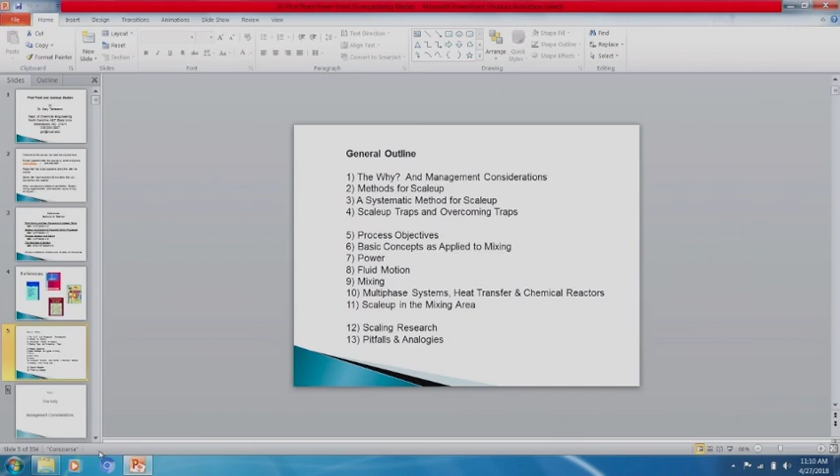The course is divided into three areas: why you do scale up, which you could call management considerations; methods for scale up, a systematic approach for scale up; and scale up traps and overcoming these traps. This material is directed towards understanding scale up in general. These are more specific scale up discussions about what occurs in an agitated tank, and this is about scale up research and pitfalls that one encounters. I also talk about pitfalls and overcoming various traps. So let's dive into this material.

The why, okay. The purpose of scale up is the creation of wealth. That's the primary objective.

Examples of scale up are penicillin, TiO2, NutraSweet, flu vaccines, and I'll toss in the airplane for some mechanical device scale up. The airplane obviously started out with one person aboard, and now they can put 500 people on an airplane, and in a sense that represents a scale up.

Scale up depends a lot on trial and error, a lot on serendipity, and a lot on simple luck. Luck visits those with a prepared mind—that's a statement attributed to Pasteur. It's very, very true.

The reason you have a prepared mind is much like a football team or sports team practicing—you get prepared for when the big game happens. It's the same sort of thing. You continually learn, you continually develop, and you're more likely to capitalize on luck.

Let's take a look at the Wright brothers and the invention of the airplane. The first thing you should recognize is that they invented the airplane without a design manual. There was no preconceived design manual available, so they had a lot of attempted flights and a lot of crashes.

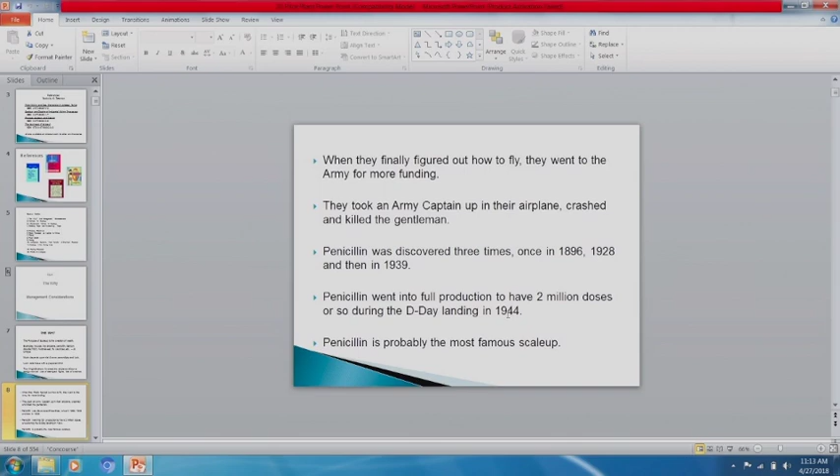If I take a look at penicillin, it was discovered three different times: 1896, 1928, and then in 1939. Penicillin is perhaps the most famous scale up because of World War II. In 1939 they scaled up the process, and they probably had 2 million doses of penicillin by the D-Day landing in Normandy in 1944.

TiO2, titanium dioxide, is a white pigment used in almost everything. In the development of DuPont's TiO2 process, the research equipment kept on exploding again and again. Many times the researchers had to ask for money or funds to rebuild their equipment, and when they finished the scale-up, the TiO2 process was essentially a controlled bomb. So scale-up does have its hazards.

NutraSweet was discovered by accident, again simply by luck. Present day, you have flu, swine flu, bird flu, whatever—these vaccines are limited by the method of production. How much you can make is limited by the method of production.

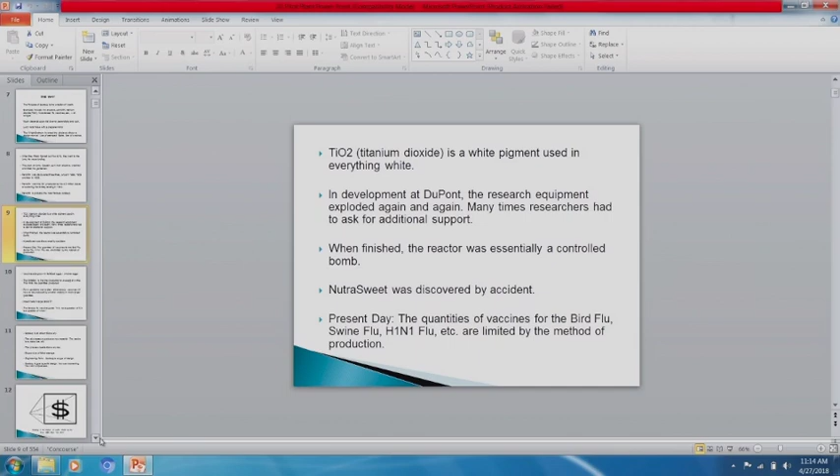Vaccines are grown in fertilized chicken eggs. I'm not quite sure how many doses of vaccine they get per egg, but the fact that they're fertilized eggs means there's going to be a production limitation somewhere. Vaccines should be produced by other methods so we can obtain much larger quantities, perhaps scaling up to insect cells in large tanks. These insect cells are living items, so particular attention must be paid to keeping the cells alive.

The famous quote from people in the flu vaccine area is, 'It's not a question of if, it's a question of when.' It's not a question of whether a flu pandemic will happen—it will happen, it's just a question of when. It's an interesting statement, really a statement about funding. It's basically saying, please send more money.

Scale up is all about discovery. The lab creates a product, maybe a new material, and the desire is to make lots of it. The process needs discovery too—expect a lot of failed attempts. That's very true, and I'll repeat: the process needs discovery too.

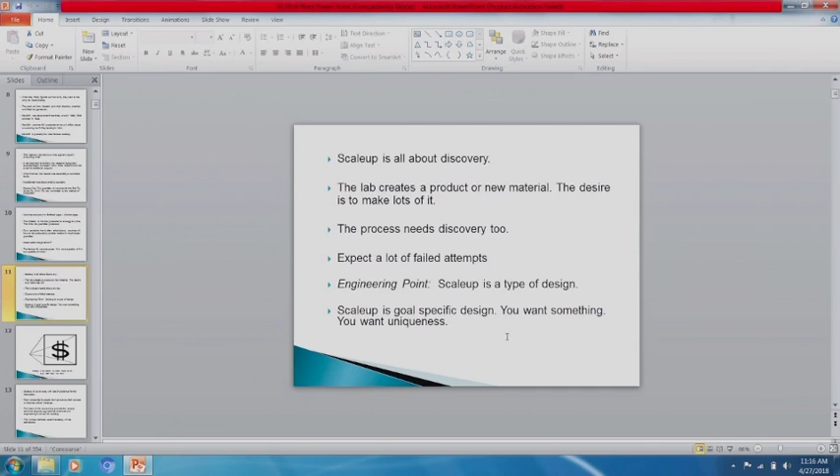A very important point often missed in scale-up is design. Scale-up is a type of design. Most people who do scale up are not design engineers, so they have a tendency to do things that design engineers wouldn't necessarily do. Scale up also tends to be goal specific—you want something, you want uniqueness.

So here's the scale up of the idea of the creation of wealth. Way back here is the lab. The lab people are very important because they are the ones who create the new product. Then the problem with scale up is that you have to make large quantities of that product.

There's lots of stories I can go into. One company made a really fantastic product, and their lab was sufficiently large that they could produce a large quantity of the material, which they sent out to their sales staff. The sales staff sold all this product, and the company got a huge number of orders coming in. Then they realized they didn't really know how to scale up the process to make a whole bunch of this material. So that was a series of bad events, I guess.

Good events, bad events—and they had a motto for this product: 'We will make this product no matter how much money we lose.' You don't want to be in that situation. You'll also notice that the lab people are not design engineers—highly likely that they're not. It's also highly likely that things will change in scale up. The procedures may change; whatever you did in the lab is not necessarily what you want to do at full scale. You want versatility in your design, to be able to change things.

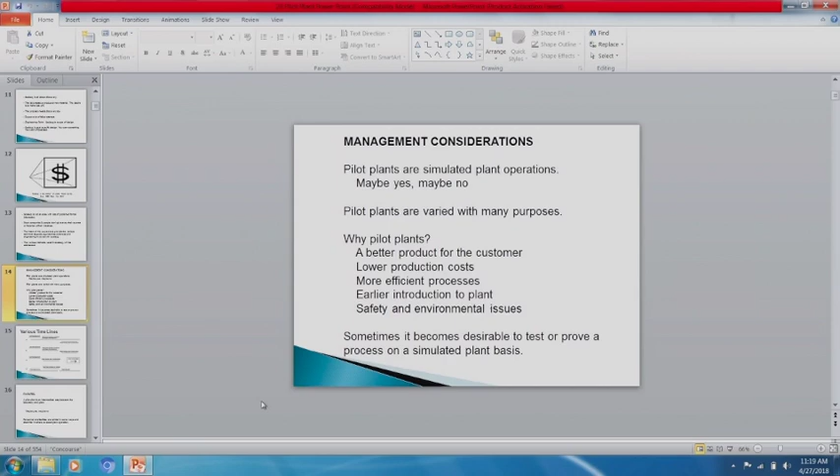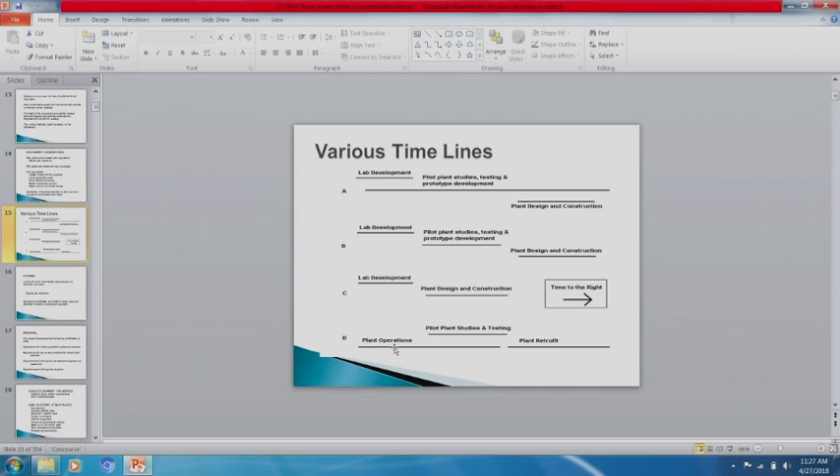Facilities - well, a pilot plant might be an intermediate step between the lab and the plant. Personnel and facilities, similar in some ways and dissimilar in others. Personnel, now this is kind of interesting - it's wise to have personnel that have a combination of skills.

Hopefully they have experience of what's possible in a plant environment, experience with day-to-day operations or problems that arise in a plant. Then you need somebody with the thinking and experience of a developmental engineer and researcher. That's one idea. The third property is the experience and thinking of an explorer. If you're doing true scale-up, something that's never been done before, you will find that you're exploring, basically.

Thinking and experience of a developmental engineer and experience in day-to-day operations - those are a fairly unique set of skills. The way you get those skills is you go to the plant and work there for a while, then you go into development and work there for a while, and then you go into sales, perhaps, to identify new products that the customer may want.

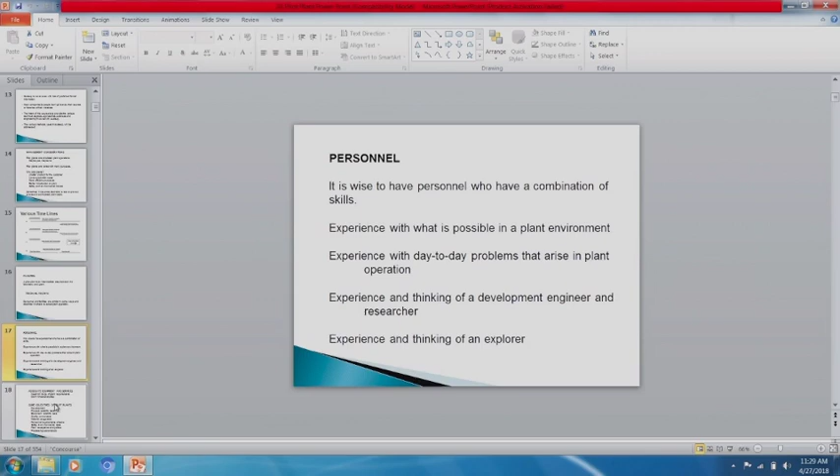Okay, again, this is not - actually, you need a full range of plant. You need equipment that will offer a full range of plant requirements. You don't want to hinder your studies.

Objectives of the pilot plant: development, reliability tests on the process, equipment reliability tests, quality control tests, material usage tests, personnel requirements checks, safety and environmental issues. By the way, if you want to stop a scale-up process, then you raise questions about safety or you raise questions about pollution - that will usually stop a scale-up. Then you have the plant acceptance issues and politics and cost analysis type thing.

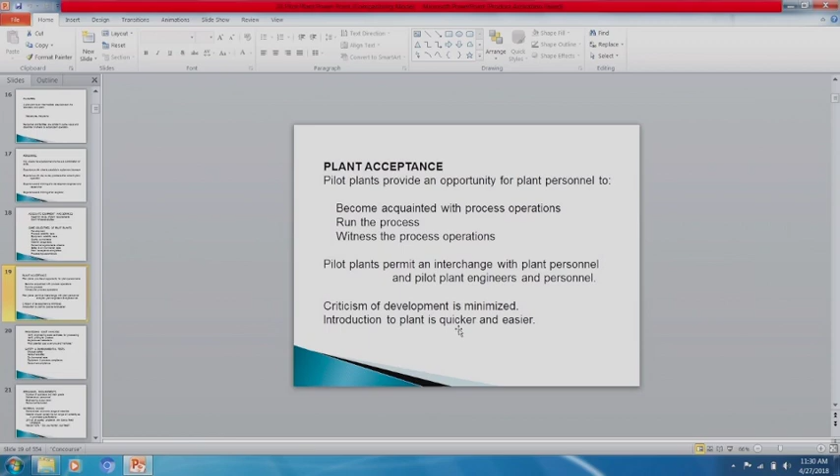Plant acceptance - good idea. It lets the plant become acquainted with the process, allows the plant to run the process, witness process operations. Such operations permit an interchange with plant engineers and pilot plant people. You keep criticism to a minimum and you have introduction into the plant, which is quicker and easier.

Environmental issues, again, we have said that. Personnel, safety, environmental, equipment compliance, personnel compliance. Then you can also perform cost analysis, verify pricing for the product.

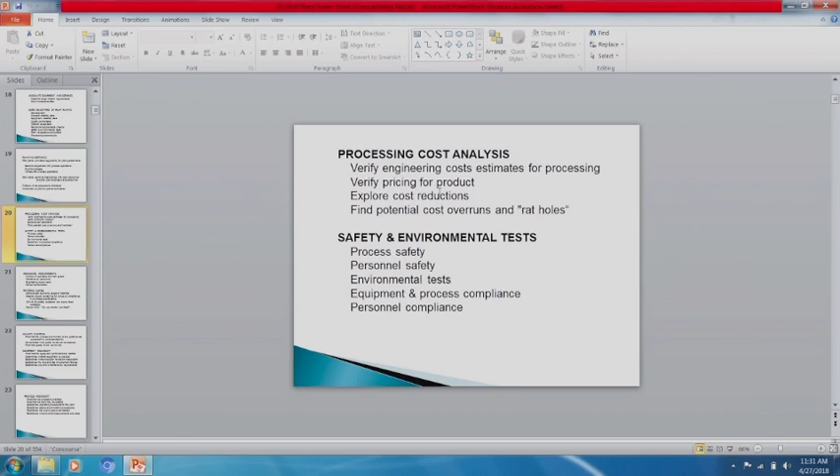Again, you make a batch of material and you send it out to your sales force to see if the product is desired. You're looking for cost overruns, potentially rat holes. You are trying to explore the number of operators you need. Maybe you wanted to explore material usage.

Material should contain a full range of variability that the plant will be faced with, right? See, the chemistry labs often run reagent grade purity, and they have a set of results from those studies. However, the plant may be receiving their material in carloads, and the material quality is significantly reduced in the plant, and this can cause significant scale-up issues. So the laboratory should consider running their experiments, or some of their experiments, with plant-grade material or material that the plant's going to have, rather than reagent-grade material.

And you should always consider monitoring your feed. Funny story here: you had a filtration process and everything was working fine, the filter aids were working fine. Unfortunately, one bag of filter aid contained a significant amount of fines, and that essentially shut down the filtration process. Fines will shut down your filtration process.

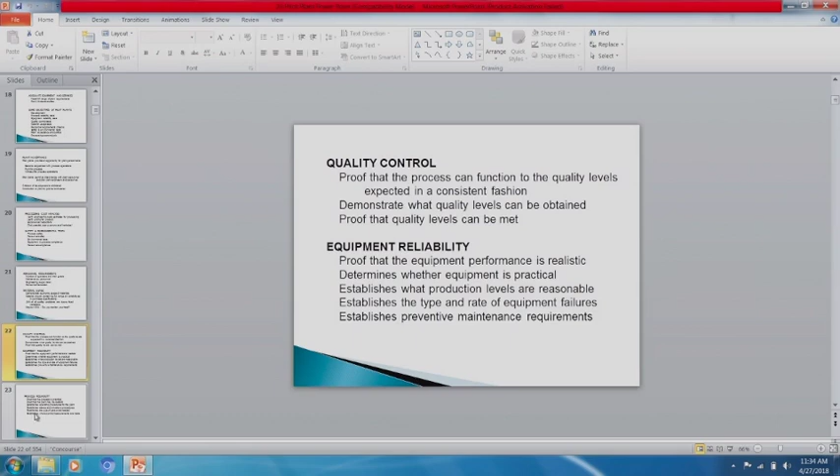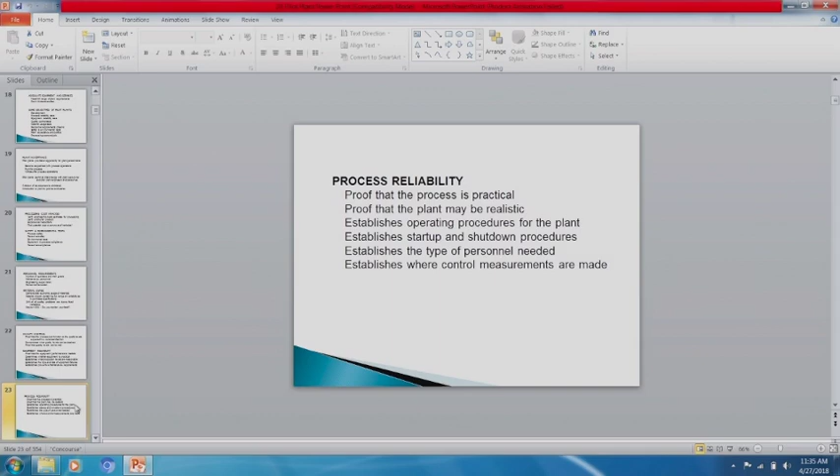If you're going to have process control on your equipment, then you must determine where you're going to take the temperature reading, what flow rates do you want to have happen, or how you're going to make them.

Development, yes, development. Run tests, analyze data, debug, do modifications of the process, improvements and changes, eliminate unforeseen problems, equipment redesign, retrofits. This relieves the plant from testing and permits experienced developmental personnel to work on the problems.

Okay, methods for scale up. Okay.

Methods for scale up. I have identified 4 different methods for scale up. One is repeating designs. It's very common, very standard, not really thought of as scale up, but that's what it is and what it accomplishes. The purpose of scale up is to increase production quantities.

Regular design methods: if you know your process and it's been around a long time, where there are established design calculations, you just design the process. Whenever you design a heat exchanger, you run through heat exchange calculations, determine the area of the exchanger, and then determine what size tubes to use.

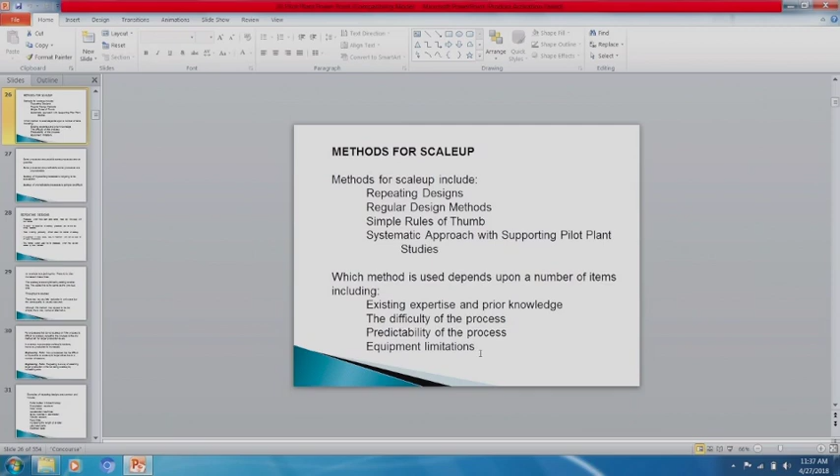The method depends upon a number of items: expertise, prior knowledge, difficulty of the process, predictability of the process, and quickly you run into equipment limitations. You should recognize that some processes are possible, some are not. Some are predictable, some are unpredictable. Scale up of an impossible process is not going to be successful, period. Scale up of an unpredictable process is going to be difficult, period.

So let's look at repeating designs. First off, the process has been done before and needs very little study. To satisfy the objectives of scale up, the process is simply repeated. There's nothing particularly difficult about this method. It's practical in many cases, easy to implement, and can be used for all types of processes.

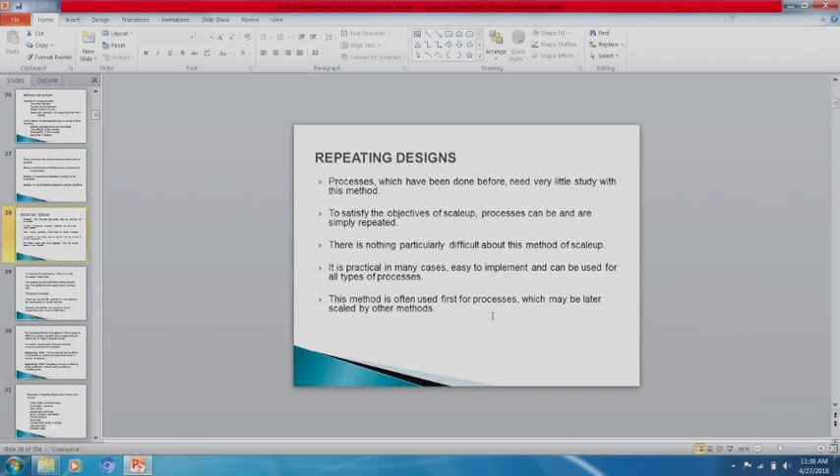This type is often used first, which may later be scaled up by other methods. An example would be a packing line. If you're going to have a packing line, oftentimes the scale up would just be repeating that same packing line.

There's no size increase, so in a sense scale up is not really being accomplished - the added line is the same as the previous one. Throughput's doubled, but there's very little reduction in unit cost. The quality is essentially assured.

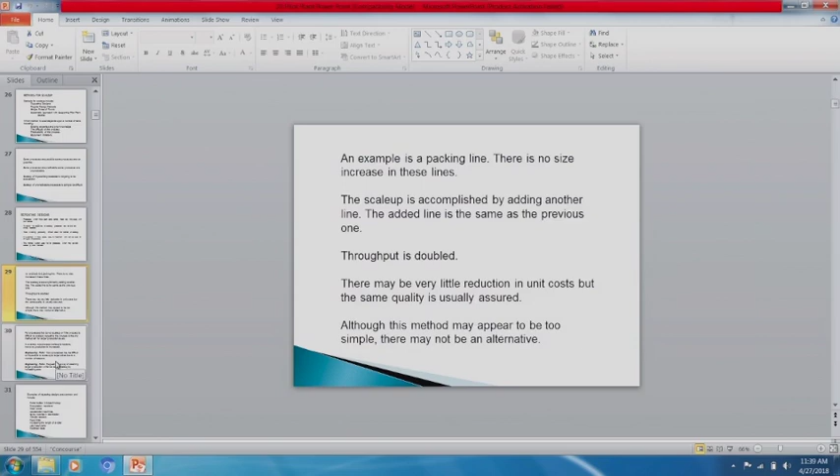This method may appear too simple, but there may not be an alternative. Some processes do not scale, or are difficult to scale. Repeating the process is the only method left for larger production levels. As I said earlier, in a true sense scale up is not done, but production is increased.

New processes may be difficult or impossible to scale up to larger sizes for a number of reasons. Repeating is a way of obtaining larger production while not doing scale up by increasing size. Some examples of repeating design are everywhere.

Roller bottles in biotechnology - you have a roller bottle used in a laboratory, and you've performed studies on how to grow biological material in rotating or roller bottles. You know how that works. Now, on scale up, you just buy 100,000 roller bottles and proceed with your plant operations. However, that can be quite labor intensive.

Precipitation reactions will have a scale effect in them. What's meant there is you add a stream to a batch of liquid and form a precipitate. How that's added determines, or influences, the particle size of the precipitate.

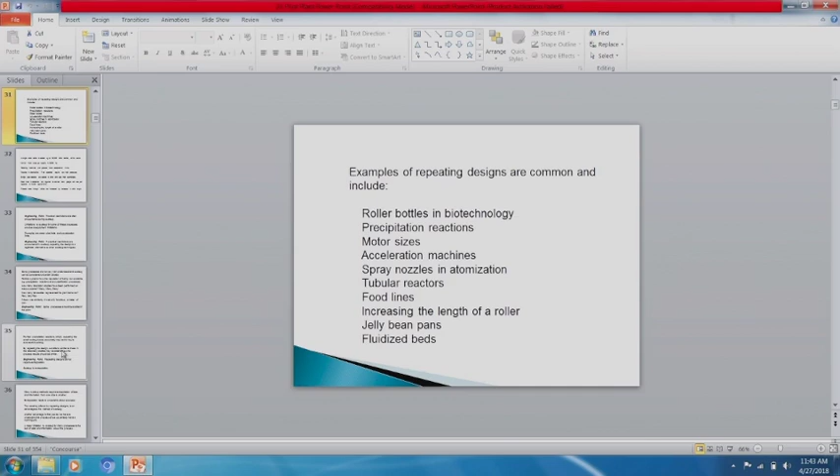So here's a brief example: 100 roller bottles, 6,000 horsepower. Tableting machines and presses have acceleration limits. Atomization is limited by very high pressure drops. Single tube reactors are scaled to a shell and tube heat exchanger. Food lines and cafeterias required to service more people just add another line. Processing rates through rollers are increased by increasing roller length. A couple of things you should recognize here.

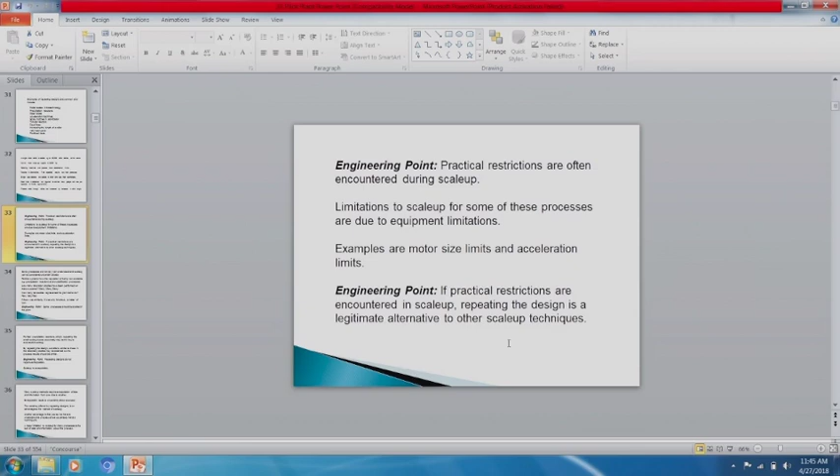Practical restrictions are often encountered during scale-up. Limitations to scale-up for some of these processes are due to equipment limitations. If practical restrictions are encountered, then repeating the design is a legitimate alternative to other scale-up techniques.

Some processes are not very well understood. Scale-up can be considered uncertain at best. Particle systems have the reputation of being non-scalable. Examples might be precipitation reactions and crystallization processes. So when you study these non-scalable processes, you have laboratory studies on those, and you will find that laboratory studies may not be useful to represent plant behavior. If the lab and plant do agree, it's only fortuitous—only a matter of luck.

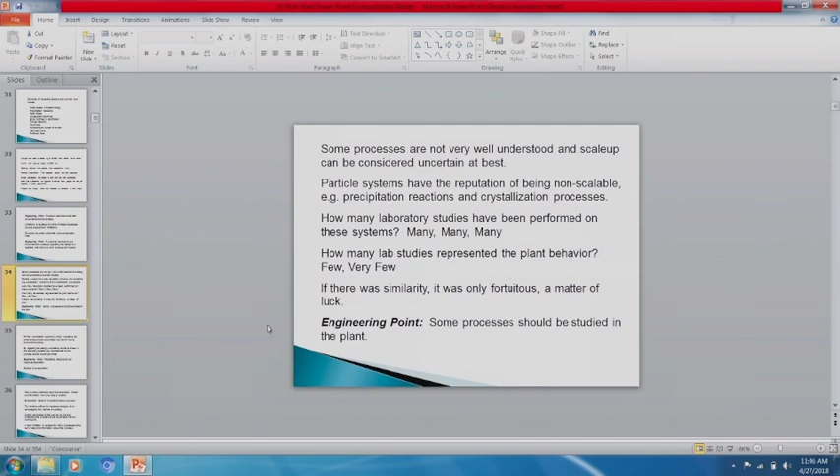Oftentimes some processes, for troubleshooting purposes, need to be studied in the plant. Fast precipitation reactions simply repeat the small-scale process accurately—this may be key to successful scale-up. By repeating the design, conditions similar to those of the laboratory may be attained, as the process results should be similar. So another big advantage of repeating designs: it does not require extrapolation. Scale-up is extrapolation—you are taking things to much larger sizes. If you don't take things to much larger sizes, then you're not extrapolating.

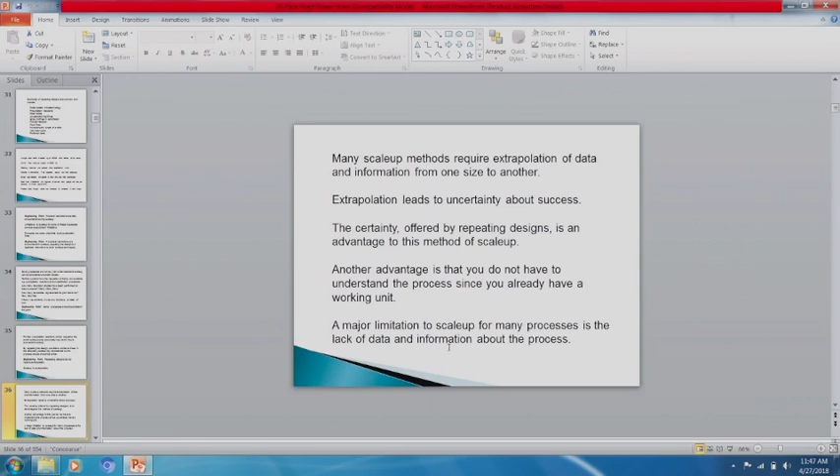Extrapolation can always lead to uncertainty about the success of your process. Many scale-ups require extrapolation of data and information from one size to another. The certainty offered by repeating designs is an advantage of this method of scale-up. Another advantage is you don't have to understand the process—a very interesting statement, since you already have a working unit. You'll find a major limitation to scale-up for many, many processes is the lack of data and information about the process.

Some difficult or impossible processes will eventually be overcome. In biotechnology, mammalian cells in the past were sensitive to high shear. Newer cells are less sensitive. This enables scale-up designs to use more traditional process equipment, like batch tanks instead of roller bottles.

While repeating small-scale processes is a way of handling non-scalable processes, the method is not very efficient. There is no economy of scale, and processing problems may not be solved.

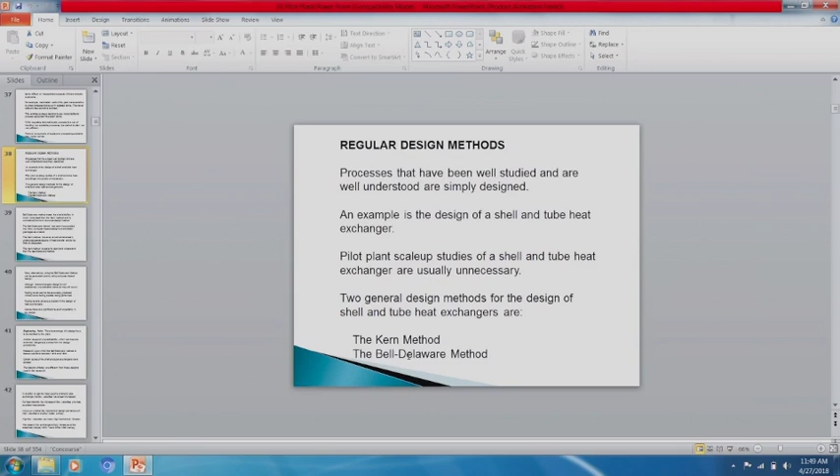The Bell-Delaware method has been incorporated into many computer-based designs—take, for example, Aspen, which incorporates the Bell-Delaware method. Getting into the details, the Bell-Delaware method treats the shell flow in much greater detail than the Kern method. The Kern method is well entrenched in undergraduate textbooks and is easier to use and understand. It took me about 30 days to make sure I understood the Bell-Delaware method thoroughly.

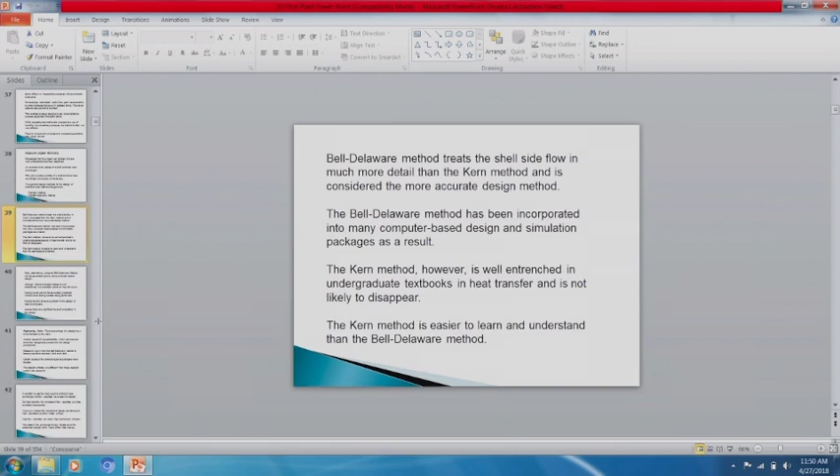Many alternatives can be generated quickly based upon computer designs. That's very important—if it's computerized, you can start varying and asking different questions about different variables, which is very, very useful.

Unfortunately, heat exchanger design is well established, although unpredictable behavior still occurs. Fouling is notorious for being unpredictable, and fouling levels cannot be accurately predicted.

Even with fouling studies, or without them, fouling is always a problem in heat exchanger design, and represents a significant level of uncertainty. You're assuming no fouling, and that's a bad assumption—everything fouls. Fouling is similar to having your dentist clean your teeth; your teeth foul over a period of time.

Shortcomings of the design have to be handled by the plant.

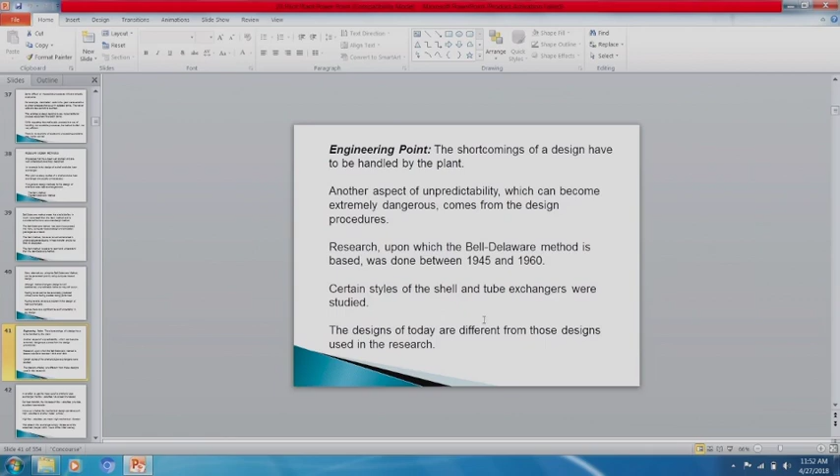Another aspect of unpredictability comes from design procedures. The research for Bell-Delaware was from 1945 to 1960, and during these times only certain types of heat exchangers were studied. Today these designs are quite different—so you have evolving designs.

In an effort to get the most out of shell and tube heat exchangers, flow velocities have been increased. Heat transfer increases with velocity; however, whether your mechanical design can take such high velocities is another matter. You increase heat transfer, but you also increase mechanical vibration. Sometimes the tubes of the heat exchanger simply vibrate out of the tube sheet, and the heat exchanger only lasts for several hours. A heat exchanger can cost $1 million.

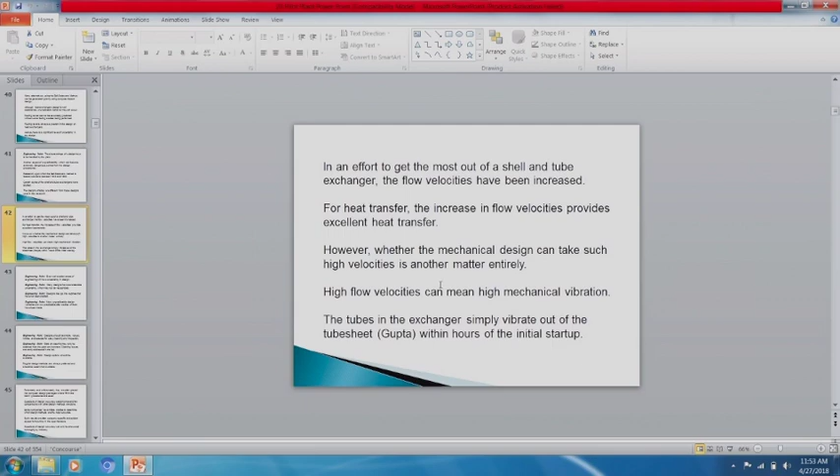So even well-studied areas of engineering will have uncertainty in designs. Many designs have considerable uncertainty that's not recognized, and may go into regimes that have not been studied. Many unpredictable design variables become very predictable after studies have been made of them.

Design should be simple, robust, nimble, and selected for easy cleaning and inspection. Data on cleaning may only be obtained from the plant environment—cleaning issues are rarely addressed in the lab. I was visiting Merck, a drug company, and sitting across the table, the design engineer said he didn't care about this or that; what he cared about was whether he could clean it, and that's critical. Cleaning can be quite critical for some materials.

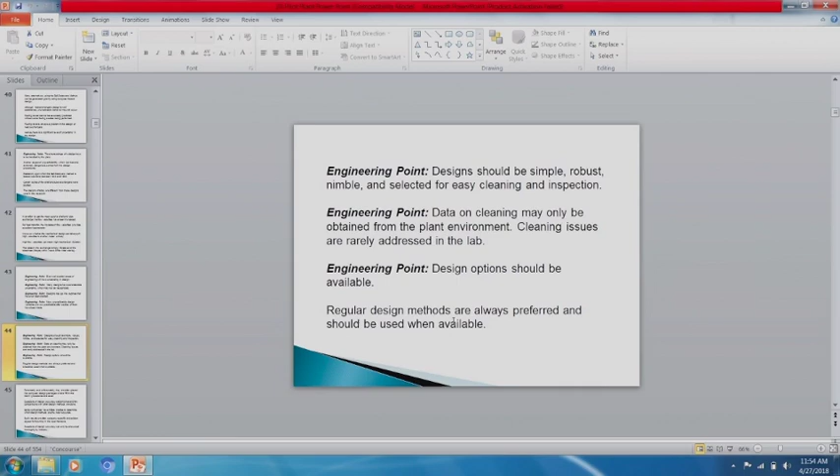You should always have available design options. Regular design methods are always preferred and should be used when available. Fortunately and unfortunately, they're often packed into a computer design package where fill-in-the-blank procedures are used, and questions of design accuracy seldom arise. Everybody believes a computer—can you imagine that, believing a computer?

Some companies have initiated studies to determine design methods for heat exchangers. This is company specific and seldom appears in forthcoming open literature. The question of design accuracy can only be answered thoroughly by industry.

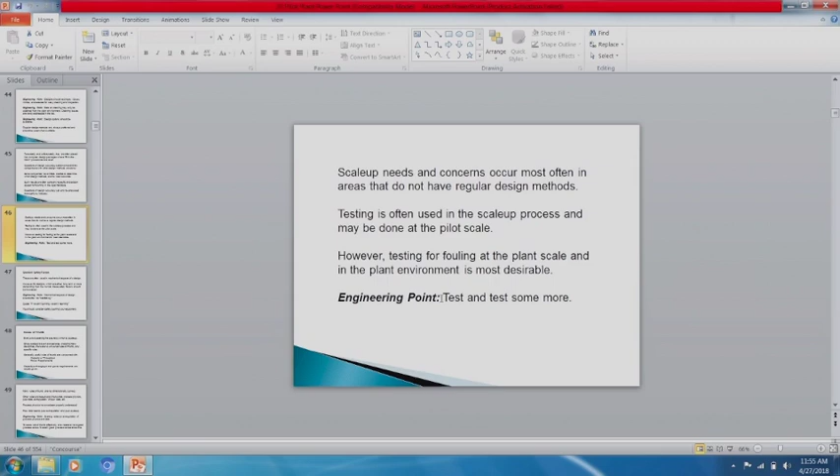Scale-up needs and concerns occur most often in areas that do not have regular design methods. Testing is often used in the scale-up process and may be done at the pilot scale. Testing for fouling in the plant scale and plant environment is most desirable, so you're more apt to test and test and test and test some more, basically.

Safety factors—quite an interesting area. Useful in mechanical aspects of design. Typically, mechanical engineers will use a safety factor of 1.5; maybe you should go with 2.5, just from the point of view that you will probably be pushing your equipment. So mechanical aspects of the design should be beefed up.

A quote from Mobil Oil Corporation, before they were part of Exxon, basically said, 'if we ain't burning, we ain't learning.' What that means is if we're not pushing the equipment, we're not learning anything about it. You should always consider safely pushing your equipment.

If I go to Europe, the Europeans are very precise people, very different from Americans. When they design something, they want to run the equipment at the design specifications. In the United States, however, running the equipment at the design specifications was what was being done 3 years ago. They've pushed the equipment beyond that by a considerable amount, and as a result they're making more profits. Again, the idea of scale-up is to make profits. You should always consider pushing your equipment.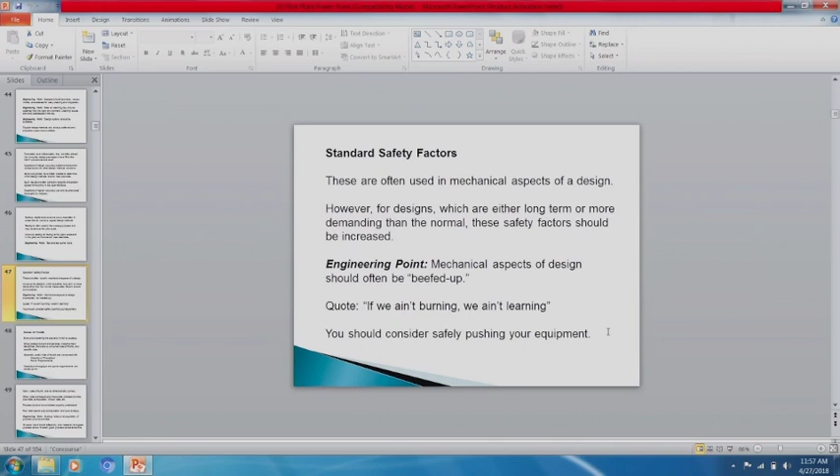Rules of thumb? Basically, everybody's seeking the secret by which scale-up can be done. It's such a broad area, crossing many disciplines, that there's no universal rules of thumb. Typically you're interested in capacity, throughput, and power requirements, and usually you find these are given.

The data, unfortunately, may not support some of these rules of thumb. Watch out for rules of thumb that are not dimensionally correct. Others are based upon inaccurate process physics, or poor data and extrapolation of poor data. Process physics have not been properly understood. Poor data leads to poor extrapolation and poor scale-up. Scale-up relies on extrapolation of process data, physics, and data.

To use a rule of thumb effectively, one needs to have good process sense. To obtain good process sense, it takes time.

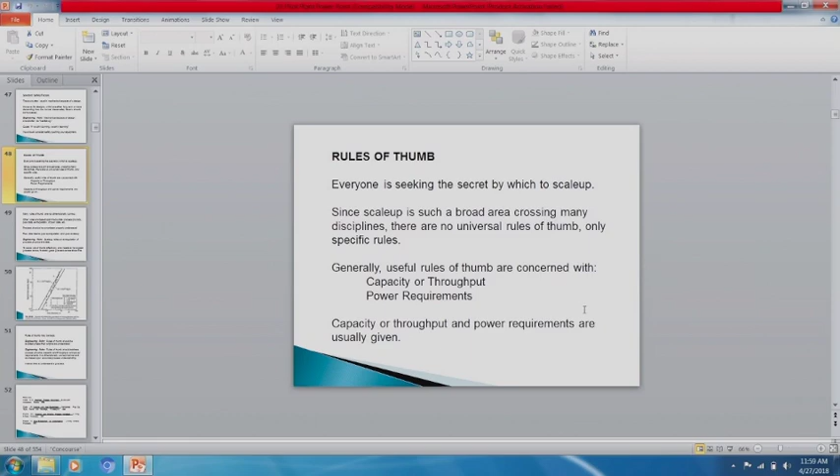There's three types of process variables: fluid properties, energy levels, and geometry. Of the three, geometry is the most important. Anyway, so we have this data.

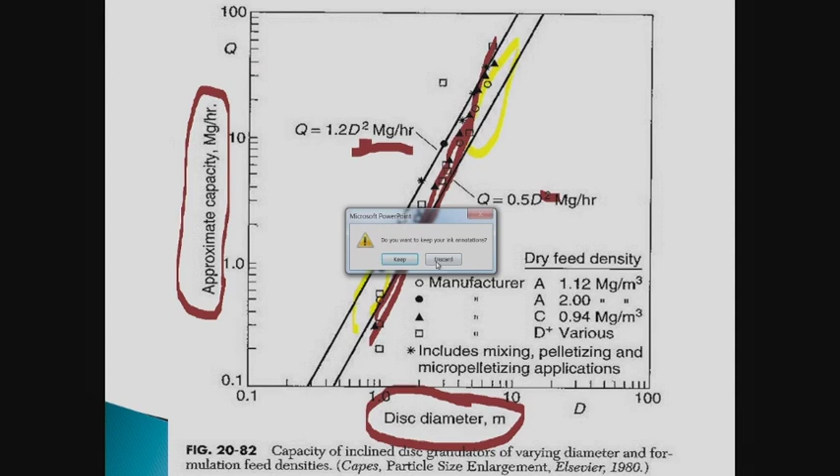Again, the diameter is very important, i.e. geometry. Let's see if I can get out of here. I guess in show, go back, discard. There we go. So, I conclude.

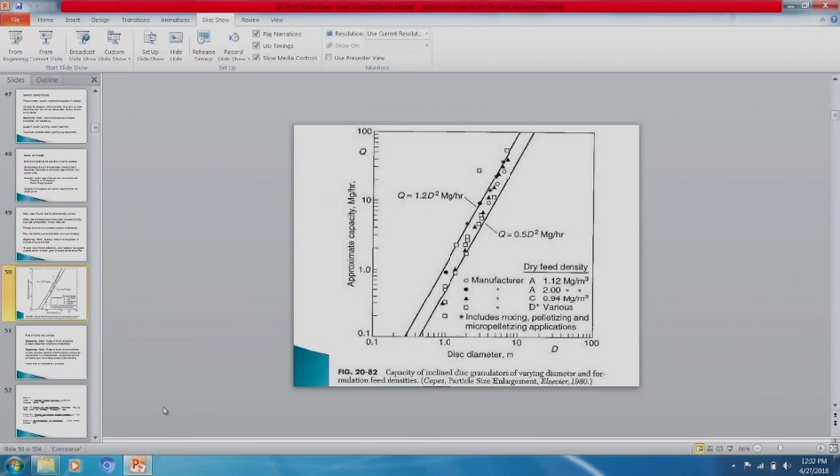Rules of thumb may be traps. Here's the rule of thumb that could be actually 3 rather than 2. And when that happens, the scale-up significantly changes. Believe me, we'll show that later. Small changes in this exponent can be significant. Well, 2 going to 3 is pretty high change.

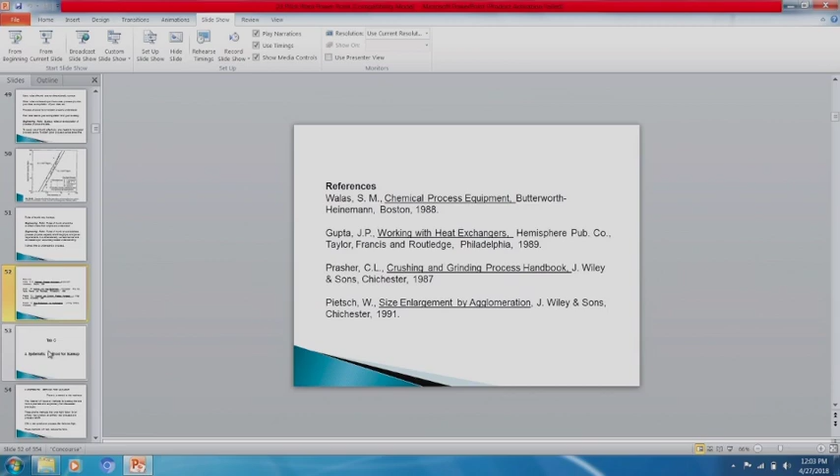Now, let's try a systematic method for scale-up, since we've talked about this a bit. I'm checking my battery on my computer to see if it's up to snuff. That may limit my presentation for today, as my battery life.

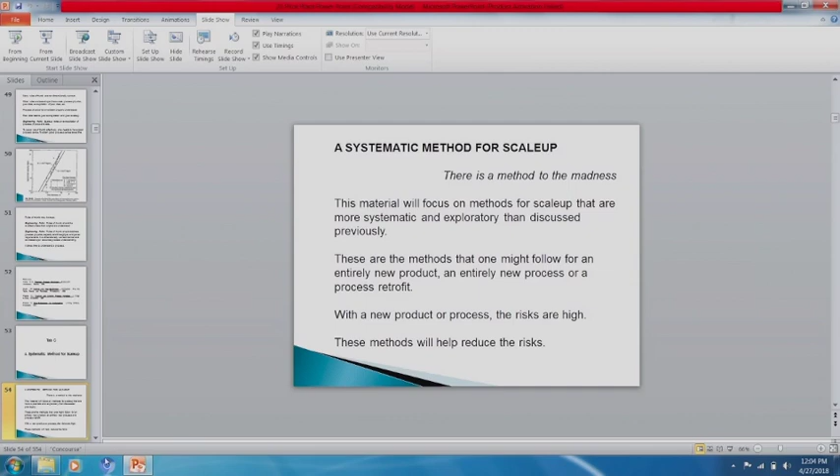So let's explore the systematic method for scale-up, and quickly we see there's method to the madness. What we want to do is focus on methods of scale-up that are more systematic and exploratory. These methods might be followed for an entirely new product, new process, or a process retrofit. We may be scaling up, but maybe we're also investigating a process retrofit. For a new product or process, the risks can be high. Hopefully, this will help reduce the risks involved.

First thing you ought to recognize is that processes have needs. It's very important - if you haven't properly identified the needs typically used in design, you may mislead yourself. Often needs are expressed as size or duty, but I tend to think more in a global sense about needs. Needs must match the process objectives and must match the processing equipment. Needs generate the objectives, and the equipment fulfills the objectives.

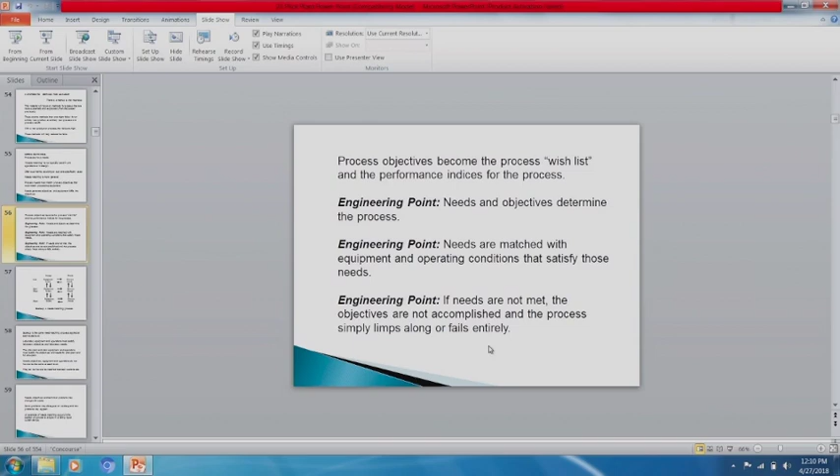Needs are matched with the equipment, and operating conditions satisfy those needs. If the needs are not met, the objectives are not accomplished, and the process simply limps along or fails entirely - usually it just limps along. Failure entirely would actually be great because that would force you to reanalyze everything.

Scale up is the same as needs matching at each level. Laboratory equipment and operations satisfy laboratory objectives and laboratory needs. Pilot plant and plant equipment must satisfy the objectives and needs of the pilot plant and full size plant. Needs, objectives, equipment, and operation do not have to be the same at each level - they don't have to be matched between scale levels.

Needs and objectives and technical problems may change with scale. Some may disappear and new ones appear. For example, foaming. Foaming in the laboratory can be notorious, right? On scale up, the importance of foaming may be significantly reduced. Foaming occurred in the lab, but doesn't occur in the pilot plant. It's hardly ever seen in the plant.

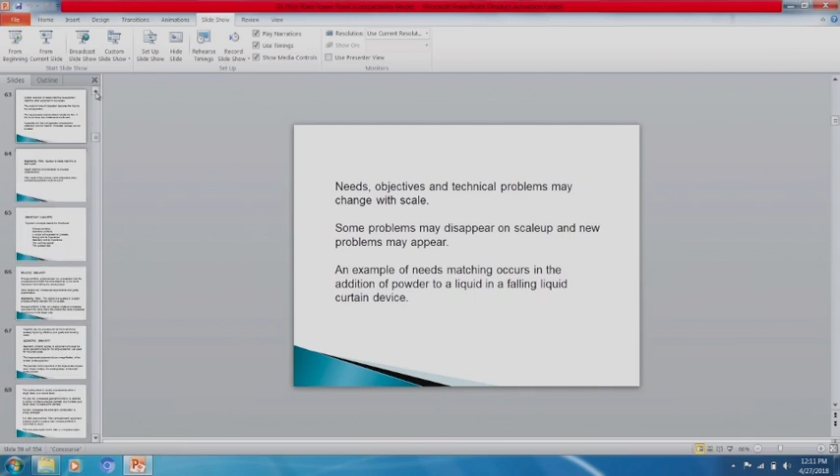An example of needs matching occurs with the addition of a powder to a liquid. Here we have powder going through a sifter that will create a cloud of powder, right? And each powder particle is separate. It's been separated out from the lumps. The lumps have disappeared and it's all single particles.

The number of surface undulations will match the number of particles. So you have a size matching going on, matching of sizes. And at the same time, the concentration of particles will match the concentration of the surface undulations. So what happens in this device is the size of the surface waves matches the size of the particle. The number of waves matches the number of particles. Processing is done one particle at a time. That's what's necessary. If the particle is not done one particle at a time, you will form lumps.

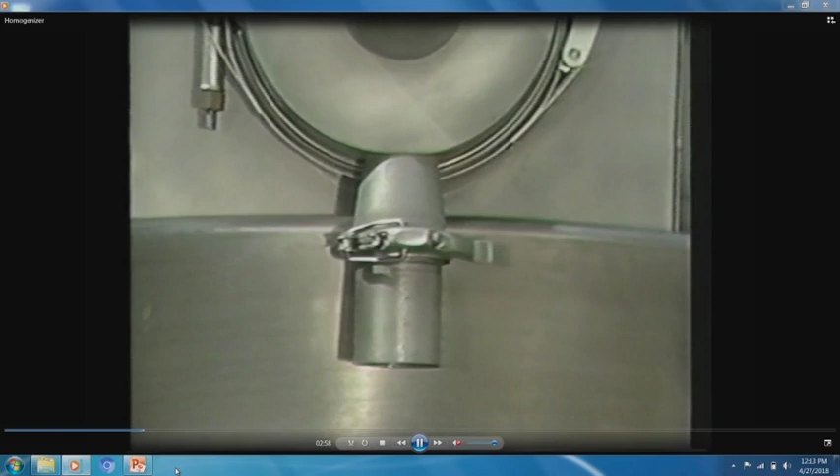It's very possible that without the sifter, you could have lumps form in the falling liquid curtain. Let me show you a falling liquid curtain here. There is a ring here all the way around, and liquid is coming out of that ring and falling through the piping and discharging in this area.

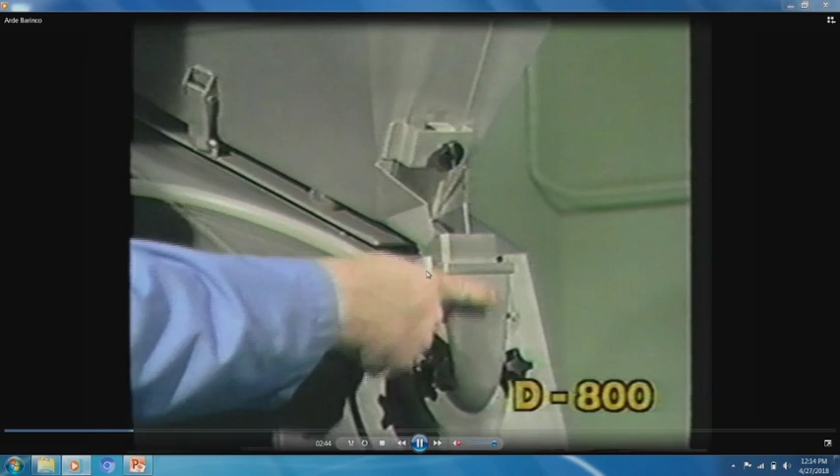You can see that the surface undulations are a significantly large number of them, and they're small, and they're matching the size of the particles. And so that's happening inside here. If you didn't match the different particles, you have a situation where you add powder to the liquid and you have these lumps.

There was one situation I ran into - I won't mention the company. They had an 18-hour cycle time for their batches. So they had a powder addition. The procedure added powder. And what then happened is the powder formed lumps. In other words, the procedure and the way it was carried out caused a processing problem.

It took 8 hours to get rid of the lumps. Then further on down in the procedure, they had another powder addition. Again, they made lumps, and it took them 4 hours to mix away those lumps. So the procedure made the problem, and the procedure subsequently solved the problem. But you must realize there were 8 hours wasted dissolving lumps, and then 4 hours wasted. So an 18-hour procedure, 12 hours were spent dissolving lumps, which should not have been made in the first place.

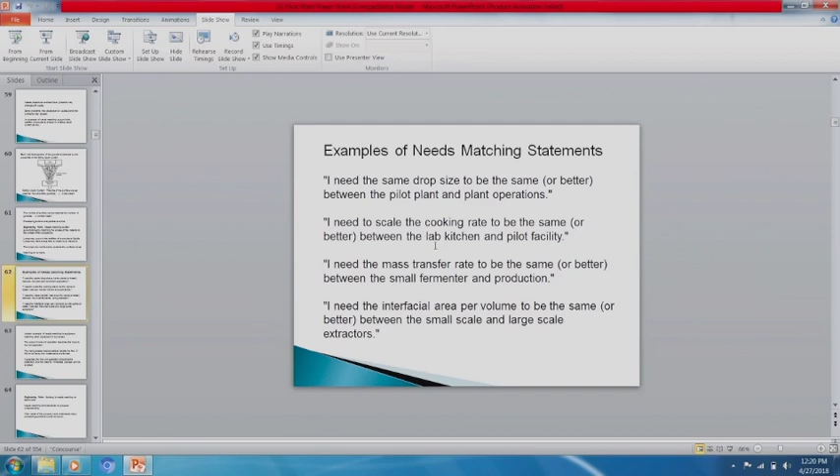I would suggest you write your needs matching statement. Some examples: I need the same drop size between the pilot plant and plant operations. I need the cooking rate to be the same between the lab kitchen and the pilot plant facility. I need the mass transfer rate to be the same between the small fermenter and production. I need the interfacial area per volume to be the same. These are pretty much English or language statements, no mathematics, but you can take drop size, cooking rate, and mass transfer rate and turn them into mathematical variables.

Another example of needs matching is when you hook up equipment. The equipment must match other equipment in the process. The output of one unit operation must become the input for the next operation. You want a good match between the two so bottlenecks aren't formed. If you're going to have a bottleneck, you want it to be the first thing.

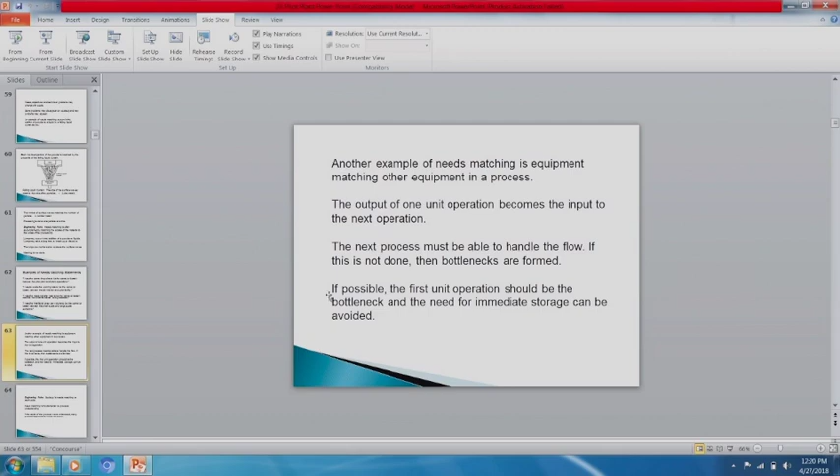Scale up is needs matching at each scale. Needs matching is fundamental to process understanding. If the needs of the process were well understood, many processing problems would not occur.

Okay, what do we got here? We've been lecturing, I think, for an hour and 15 minutes. I'm not quite sure how long. But anyway, let's persevere here and hit these major points.

Some major concepts: process similarity, geometric similarity of simple unit operations. You're always worried about energy input or power input. We're also very much interested in geometry, so working volume, where is the process actually taking place, and the important scale-up ratio, that's very, very important.

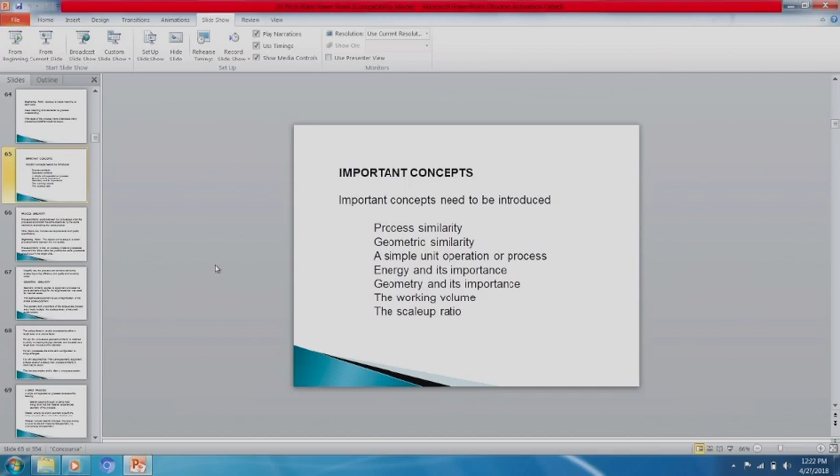Process similarity is what I seek on scale-up. It basically says what I did in the lab is what I want to do in the plant, or what I did in the pilot plant is what I want to do in the plant. Two processes accomplish the same objectives by the same mechanism, making the same product. That's usually what I call process similarity. The scale-up objective is to obtain this between two scales: whatever process occurred in the lab to make the product, the same process should occur in larger units.

We may qualify this—we may have an improved process occur in larger units. We may be targeting the fact that we want to improve the process on scale up, and hopefully we'll show you one or two examples. Hopefully the process can be improved on scale up or during scale up.

Geometric similarity applies to equipment and uses the same geometric shape for the large scale as was used for small scale. Large scale equipment is just a magnification of smaller scale equipment. Geometry and proportions at all scales are a simple multiple scale factor, which could be expressed as a length or volume. For pipe flow processes, geometric similarity is achieved simply by increasing pipe diameter, stated as a length factor increase. For a tank, however, you simply enlarge it.

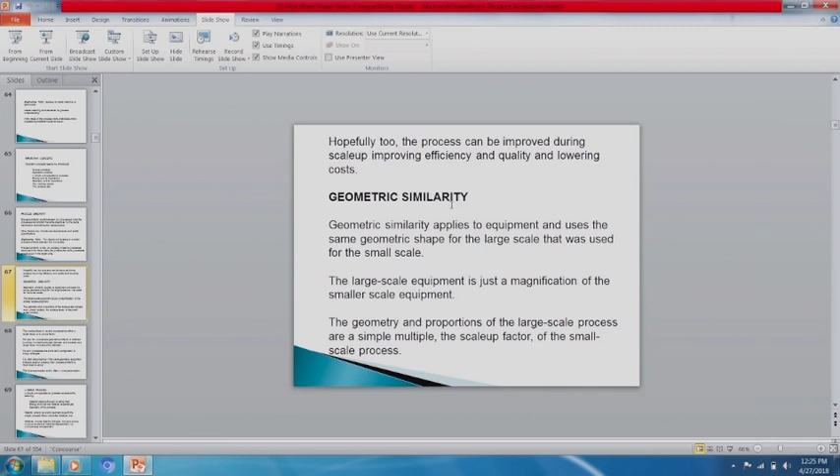Geometric similarity does not assure process similarity. Process similarity is what you want.

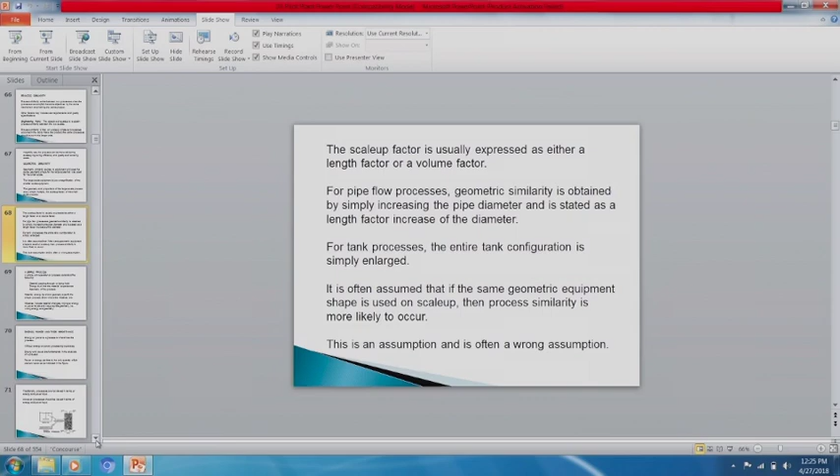I will also add that geometry is highly significant. As I said, there are three major variables: properties of the materials, energy level, and geometry. Of those three, geometry is the most important. So I would always want to seek improved geometries as I scale up.

Here it is: simple process, material, energy, and geometry. Mistakes in material, improper energy level or power levels, inappropriate geometry. Well, this is where all the mistakes are happening. There are only these types of mistakes that can happen.

Energy or power to a process is what makes the process go, or what drives the process. Without energy or power, processing would stop. Energy and power are fundamental to the analysis of the process, and energy and power per time is the only quantity a fluid element receives. That's very old fluids theory.

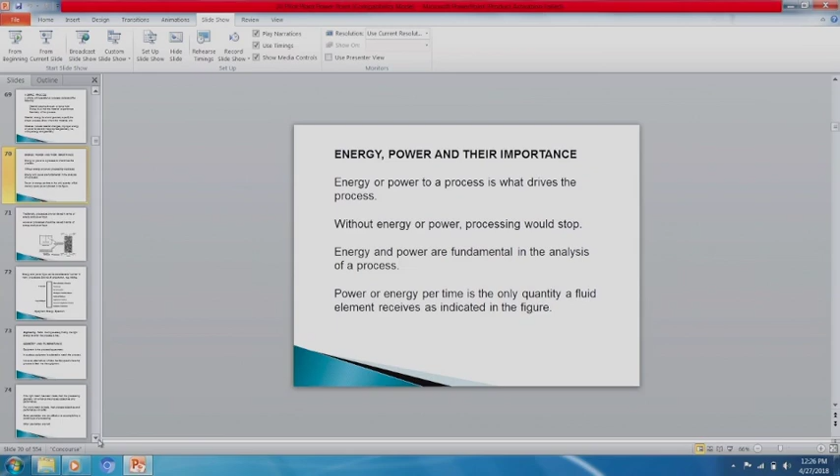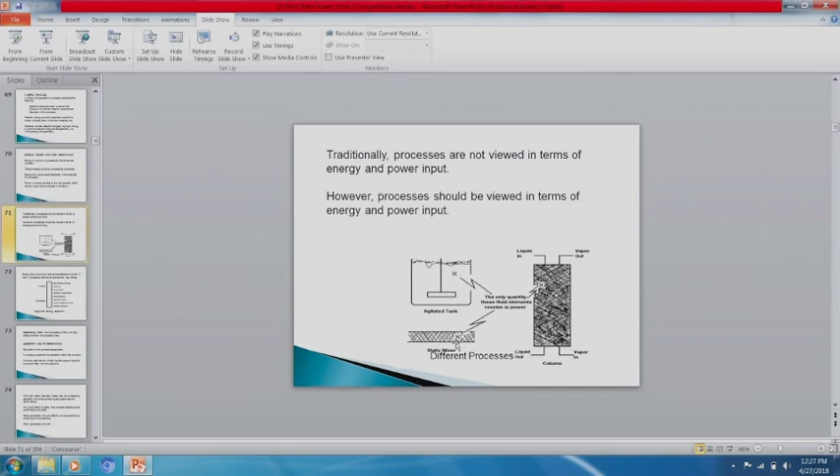Here I have a little particle of material in three different vessels. The only thing it sees is energy. So it doesn't realize it's in an agitated tank, a static mixer, or a packed bed. It's just an individual particle, or chunk of fluid. It doesn't really matter—energy, there are energy levels.

Now, microfluidic devices are very interesting, from the point of view of the cosmetic industry or lotions—it would be interesting to see if microfluidic devices have a role to play in these industries. You have substantial pressure drops occurring, 40,000 psi pressure drops in these devices.

And they can take oil and water and make it a single fluid—let me say that again—they can take oil and water and make it a single fluid. So they mix all the way down to the micromolecular level.

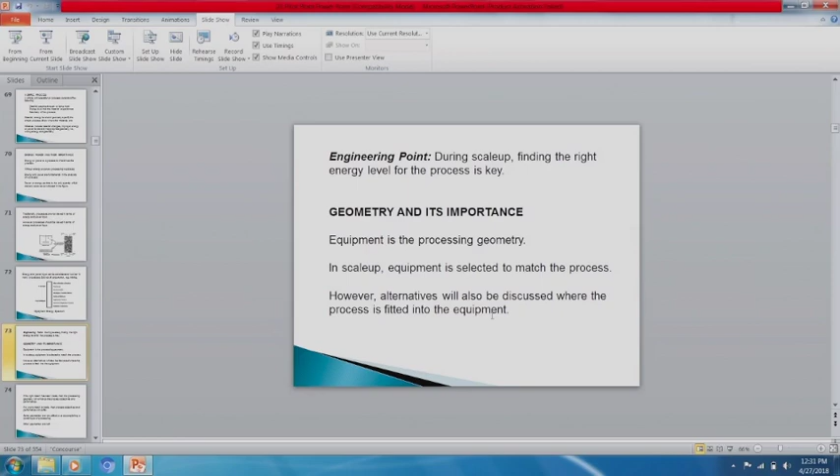Just the reverse is often done—you have the equipment and you force the process into the equipment. If the right match has been made, then the processing objectives or the processing geometry will enhance the objectives and performance. If the wrong match is made, i.e. you use a screwdriver to pound the nail in the wall, process objectives and performance will suffer.

Some geometries are very effective at accomplishing a certain type of processing. Other geometries are not so successful. So, it's pretty funny—the piece of equipment says 'mixer' on it, you read on the boilerplate 'mixer,' but it doesn't mix.

Or it doesn't mix very well. So you have a situation where, yes, it may mix, but generally speaking, it's not a very good mixer, even though it's called a mixer.

I'll show you examples of that later on. Actually, let me just show it to you right now. Slideshow from the current slide. This means I can draw over here. I'm looking for a highlighter.

One of the worst mixers in powder-powder mixing is the V mixer. It's used by pharmaceutical companies. This thing rotates around, and what happens is on this side it mixes up very well, and on this side it mixes up very well. However, there's a plane of symmetry right down the middle where there is no cross mixing.

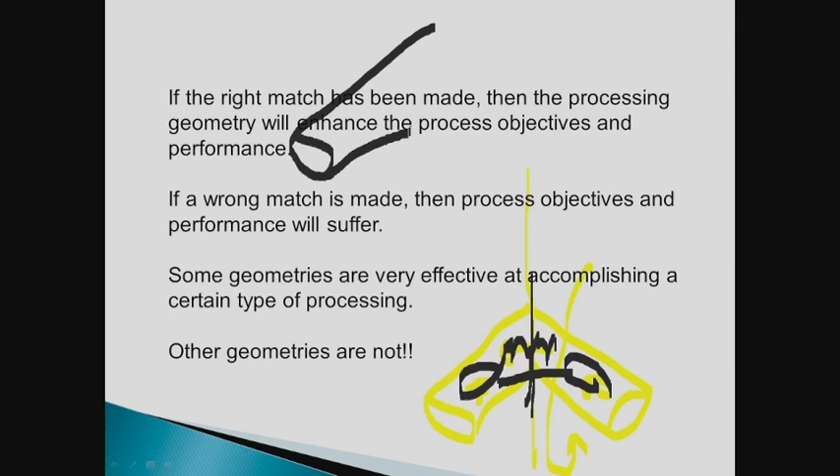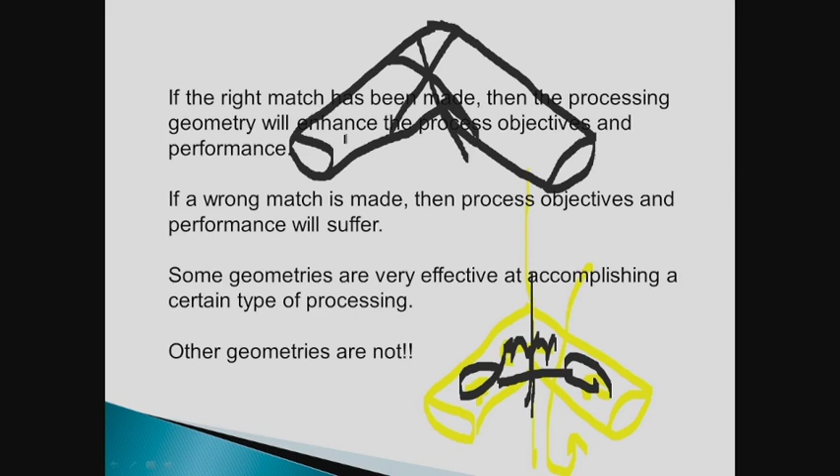However, we can redo it up here and change the geometry, where we put cross baffles in this powder mixer. What happens is when the particles tumble down and hit this baffle, they get put over here, and when the material tumbles down and hits this baffle, it gets thrown over here. So by changing the interior baffling arrangement on this V-cone mixer, you can substantially improve the mixing performance.

This mixer is sold everywhere. You can probably buy one on the used equipment market. Not a good mixer, but put internal baffles in there and it becomes an excellent mixer.

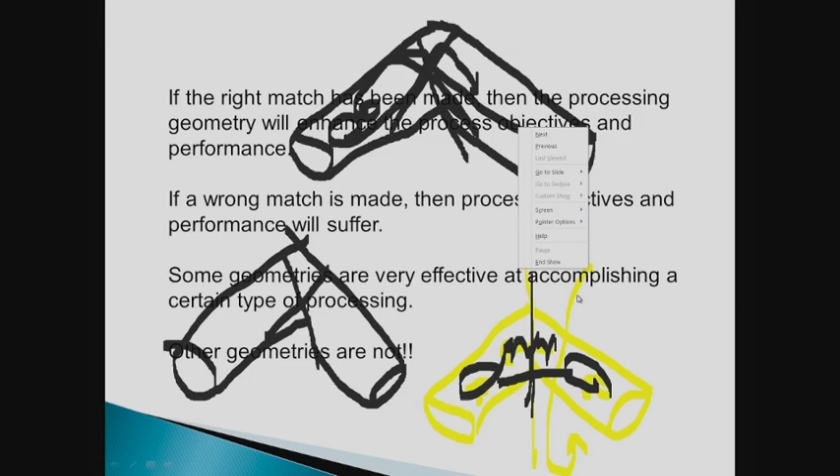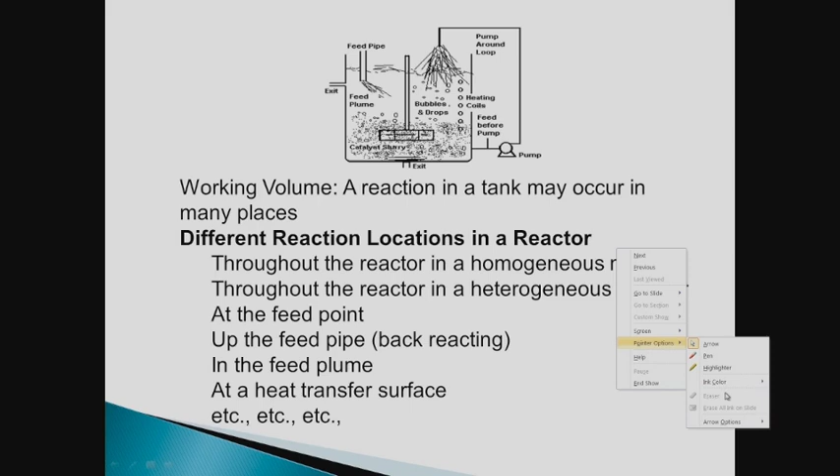If I try to identify where my reaction is taking place, take a look here. Give me some color here. First off, I should realize that the reaction can actually go up the feed pipe and out. Now that would take an extremely fast reaction, but nonetheless it's quite possible.

The reaction could be occurring right around the feed plume as it comes in. It could be that the feed comes in, leaves, exits, and then reacts over here. This is very common, by the way. Feed comes in, leaves the reactor, and then reacts.

An example of that is a car backfiring. The gasoline comes into the engine, leaves, and then ignites in the muffler. So these are physics that are difficult to determine, but can very easily happen.

Then we could have a situation where we worry about the slurry concentration. Where is my thing? So we're interested in the surface area of the solids here. The reaction takes place on the solids. We also note that there are two reactor environments here: a clear area up here that has no solids, and down here we have a high solids concentration. No solids, high solids - that means two reactor environments, two different sets of chemistries that can actually take place.

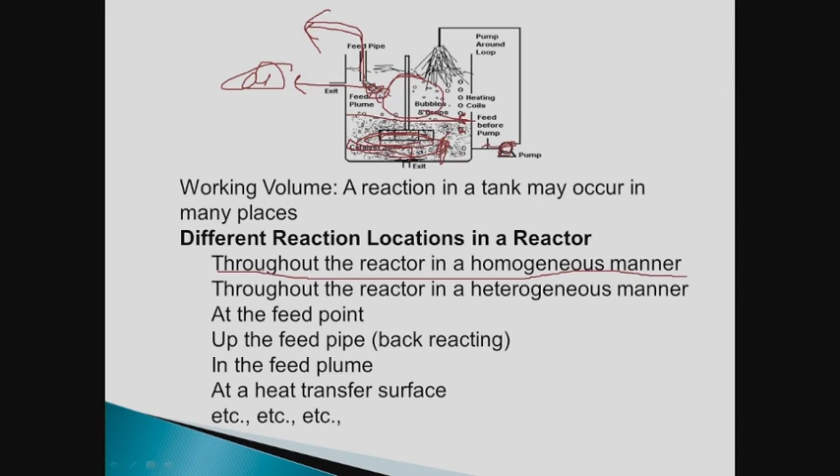From what I would gather, the idea of what is taught in undergraduate school is that a reaction occurs throughout the reactor in a homogeneous manner. Well, that may be 5% of all reactions out there. 25% is between a gas and a liquid. So you can have all kinds of places where the reaction is occurring. It doesn't necessarily occur like you were taught in the university.

I'll never forget my organic chemistry professor. I didn't believe half of what I was taught in organic chemistry. It appeared to be a lot of memorization. And I kept on asking him about other possible reactions that could take place other than the one he was talking about. He told me several times during the course that the reactions only went this way and side reactions did not occur.

It's only recently, in the last 20 years, I've come to understand that chemistry professor lied to me. Lied to me, my goodness gracious. Turns out that if you have complex chemistries going on, you have the potential for lots of side reactions, and you wind up with a whole soup of products. Our job in the reactor business is to try to minimize the side reactions to optimize the production. I don't know if anybody's into reactions, but anyway.

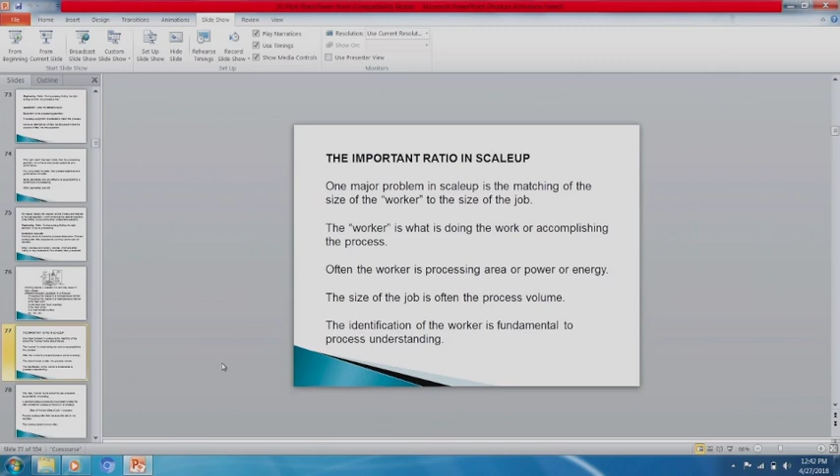The size of the worker is what's doing the work, accomplishing the process. The worker may be processing area, it may be power or energy input. The size of the job is often the process volume—not always, but often. So on scale-up, you want to keep the ratio of worker to the size of the job constant.

You want to identify what is actually doing the work that's important in your process. What's the physics of that? And then what's the size of the job for that? If I go back to my reactor, if I have the reaction occurring around the feed plume, that's where my reaction is occurring. And the volume of the feed plume is the size of the job. So that's a very important ratio.

This scale-up mistake occurs often when you fail to recognize this ratio, or this ratio is not identified. You've got to establish what's accomplishing your process, what's the size of the job. Worker over job equals constant. Now, to make your process or improve your process, you want this ratio to be greater for the plant. You want to have more worker per volume on scale-up than what was in the pilot plant or what's in the lab.

Okay, if I go back here, this identifies some of the workers in this reactor. Well, the surface area of the plume is probably the worker. Surface area of these heating coils for endothermic reactions may be the worker. The surface of the catalyst particle may be the worker. So if I look at this, I have a lot of different types of workers, so to speak. Again, to improve the process on scale-up, you don't set it equal to constant—you set it a little bit greater. This ratio for the plant should be larger than for the pilot plant.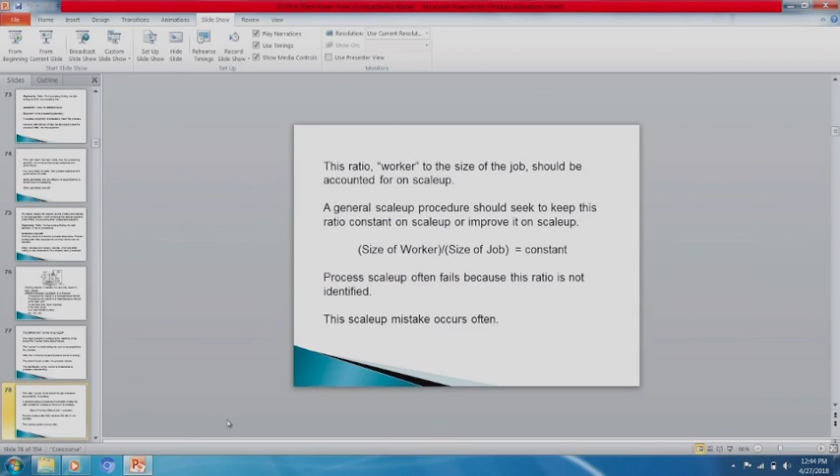So, general scale-up method. General scale-up method is based upon the idea of process similarity. The objective is to design a working large-scale process. The first step, there's various numbers of steps you go through, and the first very important step is you're trying to seek process similarity. What are the important aspects of the process? What is being attempted? You have to ask the right questions. It's very important—you've got to ask what the right questions are, and you should know what your objectives are.

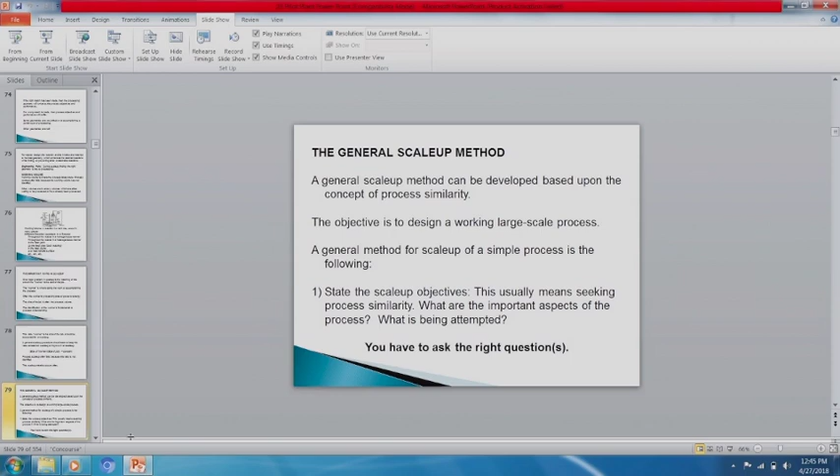It's not uncommon for me to walk into a plant and have the objectives not clearly identified. Objectives are often not known, or they're not agreed upon. Then you go and see what is doing the work in your process. What is the controlling mechanism? What's the process physics? Where is the process occurring?

Down here we have the right physics and chemistry. What are the process flow regimes? Flow regime is a description of how the flow behaves.

Here you have to have what I've called the right science. Actually, what you need is the right science and the right equipment for the job. There should be an addition there: right equipment for the job.

At this point, we're going to use geometric similarity. We should recognize that geometric similarity only serves as a starting point. It may be quite good when it turns out.

Then from various data correlations, scale-up methods are obtained. Geometry is obtained by geometric similarity. Operating conditions are obtained from data analysis. So you sit there and make a judgment.

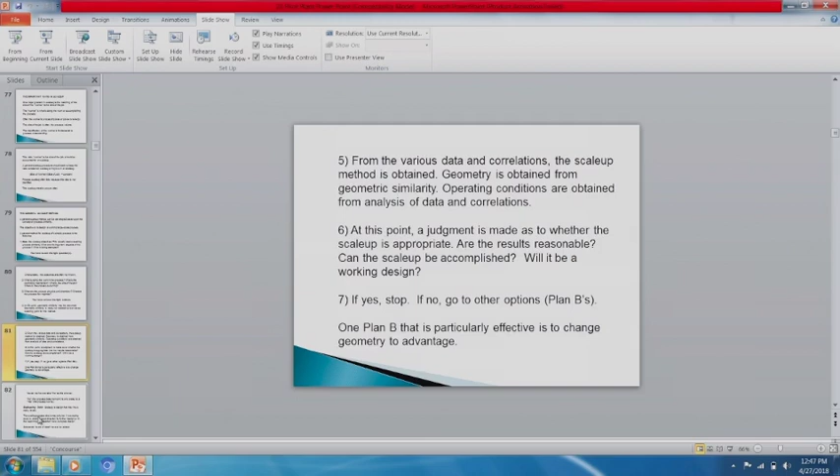The important thing is you don't accept no for an answer. No is a word you only encounter on the way to a yes. You're going to get a working process. No means the process does not work. Yes means the process works and you're finished.

Scale up is design, and this is more or less a scoping level design. A scoping level -- more detailed design can be added later. Substantial details have to be added.

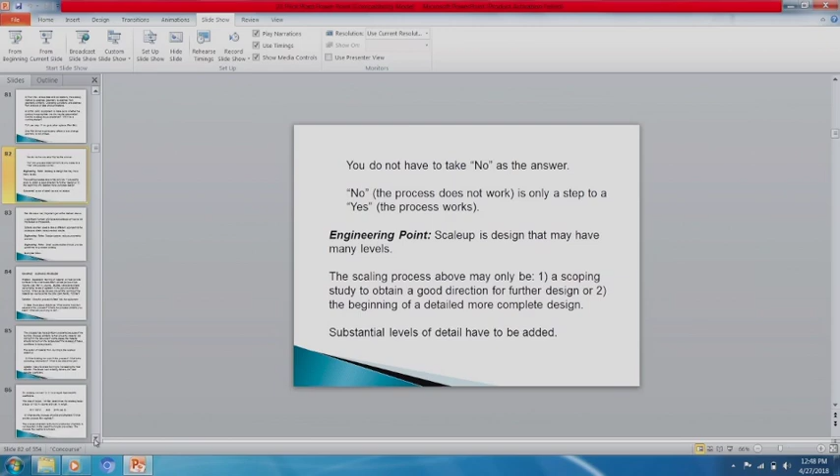Plan Bs are very important. A significant number of your proposed scale-ups will turn out to be impractical or impossible. Options are then used to take a different approach to obtain more practical results. Scale-up options reduce uncertainty and risk. Small-scale studies should provide guidelines for process scale-up.

Examples follow. So there we have it. And now it's 12:48, and I started, I think, at 11:13 or so. So if I get another 25 minutes, that'll make it a full 2 hours.

Okay, let's try the burning problem. Small scale, we have 1 liter. Heat transfer is occurring. Studies have been done at higher levels of agitation that does not have burning. What can be done to prevent burning of the material as we move into the pilot plant facility? So we're going from 1 liter in size to 100 liters.

State the process objectives. What important aspects of process similarity do you seek? What are you trying to do? That's a very important question. Obviously, you have burning.

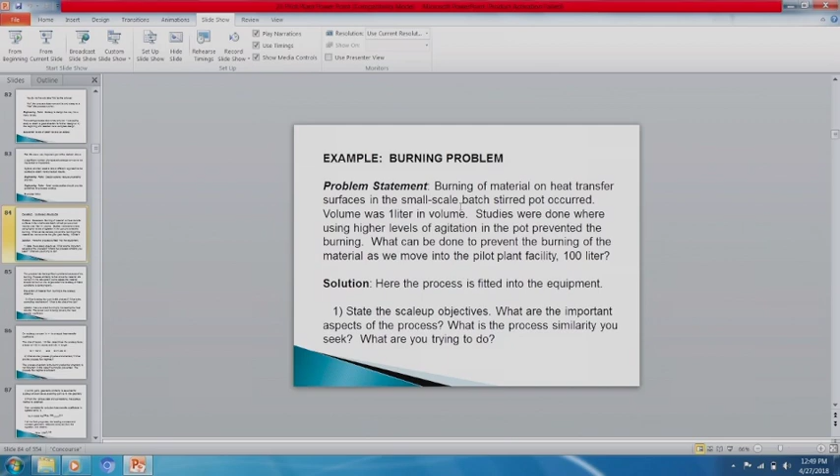The process has significant problems with burning. Process similarity is that since the material did not burn in the lab, in some cases the material should not burn on the large scale if scale-up of these conditions is done properly. So your objective is to prevent burning.

So what's doing the work in the process? What's the controlling mechanism? What's the size of the job? Well, agitation has prevented burning. This has been done by increasing the heat transfer. So actually the work is being done by the heat transfer coefficient.

So we go over here, and this establishes what we're trying to do on scale up. We want the heat transfer coefficient at scale 1 to equal the heat transfer coefficient at scale 2. The volume change is 1 liter to 100 liters, so that's 100 in volume or 4.64 in length. If I cube this, I will wind up with 100.

What are the process physics and chemistry? What are the process objectives? The process chemistry is that of a burnt product. Chemistry is not important in this case if burning is prevented. Process flow regime: turbulent. We didn't talk about flow regimes.

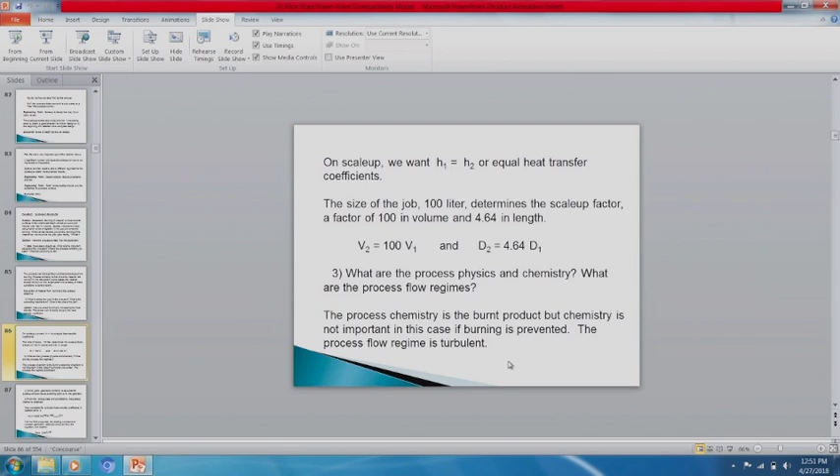At this point, we're going to go with geometric similarity. We go to our heat transfer book, scale-up method. For heat transfer coefficients, we have this: Nusselt number equals some constant times Reynolds number to the 0.66, Prandtl number to the 0.33, and a ratio of viscosity to the 0.14.

Now we're going to remove all fluid properties. So we go through the Reynolds number, Nusselt number, Prandtl number -- they're all the same fluid properties, so they cancel. We're going to also assume this constant remains the same on scale-up, and the exponents remain the same on scale-up. So we throw away the viscosity ratio because that's going to remain constant on scale-up.

So when we do all that, the heat transfer coefficient was buried in the Nusselt number. H is the heat transfer coefficient, D is the diameter. It's proportional to N, D squared, to the 0.66 power -- this is the Reynolds number. So what we have here is operating variables, which is rotational speed, and we also have geometry, which is diameter sitting there. We have a process result which we want. And away we go.

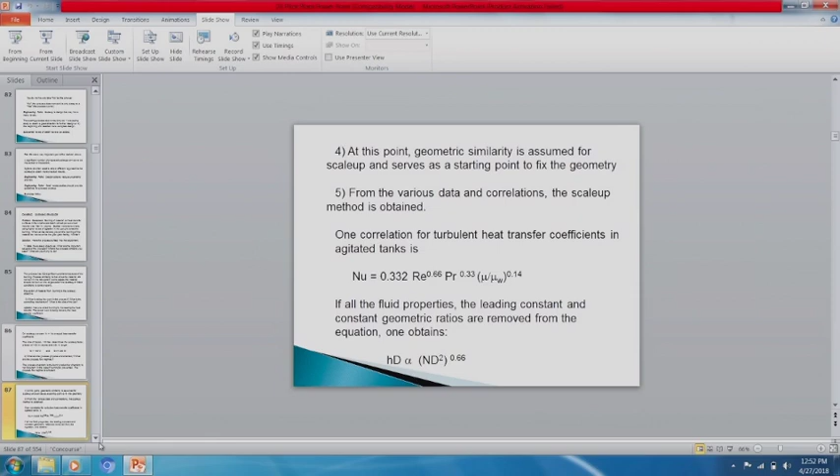The heat transfer coefficient varies as the rotational speed of the impeller to the 0.66 power, and the diameter of the impeller. Going through here, we know H1 equals H2, so scale 1 equals scale 2. I've substituted scale 2 as 4.64 times the diameter of scale 1, so the diameters will cancel out.

A relationship between rotational speeds is now obtained. I know what scale 1 was, and this equation relates scale 1 to the rotational speed of scale 2, so I can calculate the rotational speed for scale 2. Rotational speed scale 2 turns out to be about half the rotational speed of scale 1.

So from the rotational speed N2 and the diameter of the impeller, I can determine the motor size for the pilot plant.

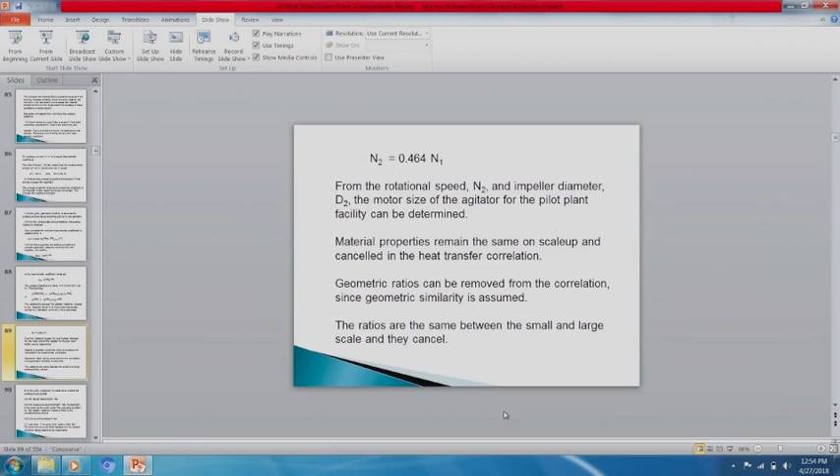Material properties remain the same and cancel out, remaining constant on scale up. Geometric similarity was used, so that lets me cancel out geometry ratios. That's the advantage of geometric similarity - it lets you get away with being slack, so to speak. You don't have to worry about it if it's held constant, since ratios are the same at small scale and large scale, they cancel.

Next thing is to judge the results. At this point, a judgment is made as to whether the scale up is important or not. If yes, it seems to be yes, it looks reasonable - half the rotational speed at scale 2. I really don't know if it's going to be actually okay, but it certainly looks like I should do some testing on it to see if it works.

Yes, the geometry is the same. Operating conditions are fixed by the procedure. For the working design, we have to go with yes. So the answer is we can stop until we test this out. Other designs are not needed.

Some items of concern here: first, the material properties may change on scale up, and this change may have to be accounted for in scale up. Second, the assumption is that the correlation was assumed to hold between both scales - the correlation's 0.66 exponent and the lead constant were assumed to be the same for scale 1 and scale 2. That may not be true, but it's a good starting point.

The origin of the correlations from boundary layer theory is a little bit significant there - we'll let that one ride until later. By using the correlation above, it's assumed that there's heat transfer similarity between the lab and the pilot plant. The boundary layer in the pilot plant equipment may be different from that in the lab scale.

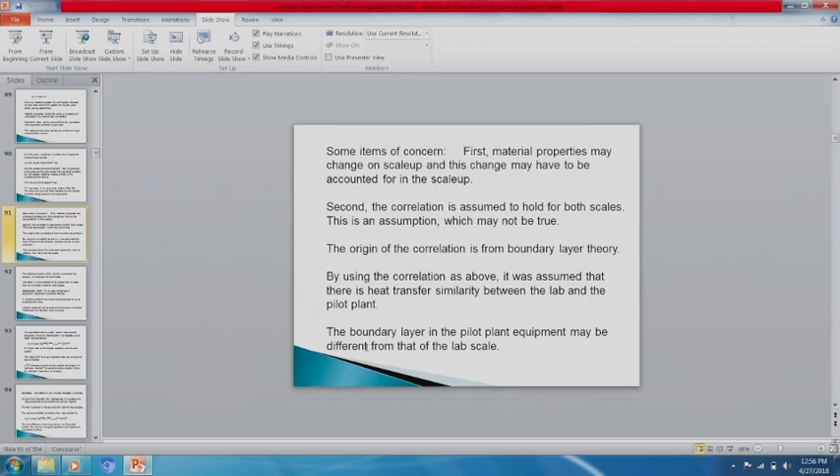The lead constant and exponents can vary. Information is not available at the present time for the correlation. You want to seek nimbleness in the equipment - the equipment should be flexible. As a result, you should always have a variable speed drive to cover problems that can arise.

Variable speed drives have become inexpensive and add to the nimbleness and flexibility of the process. When I first started teaching this material, one of my participants really took me to task when I said to get a variable speed drive. He was very angry at me because variable speed drives during that time frame were very expensive.

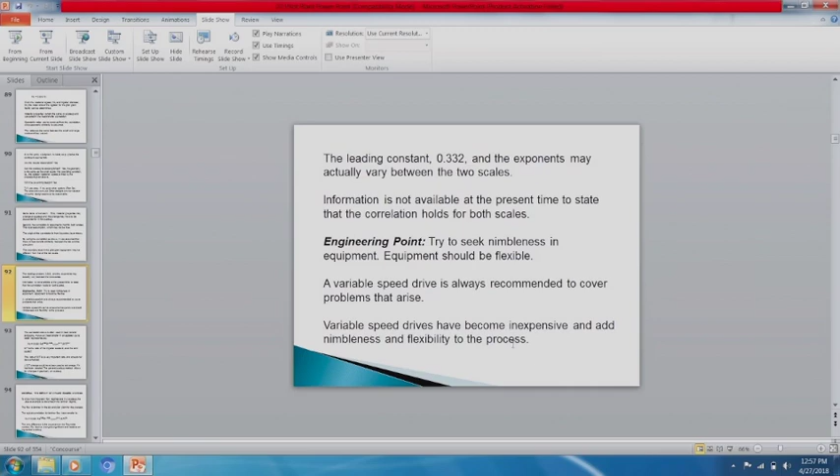I don't know if they're expensive or not, but they let you cover yourself, right? To cover problems that arise, variable speed drives have become inexpensive and add nimbleness and flexibility to the process. I would always encourage variable speed drives.

Now, the correlation above is often seen in heat transfer textbooks. What's left out of heat transfer in agitated pots is this D over T ratio. This would probably be an important starting point - the D over T ratio is the ratio of the impeller to the tank diameter, and it's a very important ratio that should not be overlooked.

The D over T ratio can be changed and used to advantage. The general method allows for changes in geometry on scale up.

Anyway, I'm going to see if I can get my technician to stop this for a while, and maybe we can restart a little bit later here. Anyway, let's take a break.